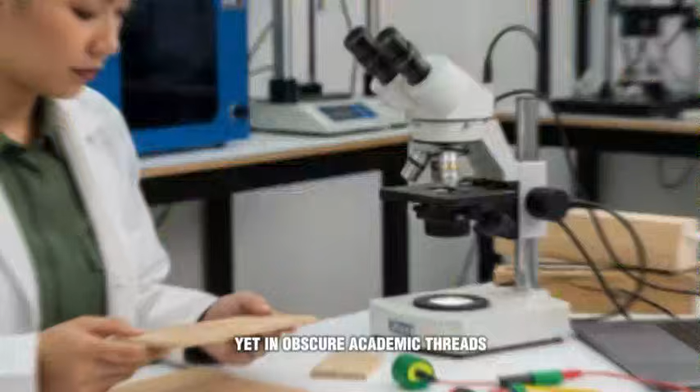Yet in obscure academic threads, a Filipino structural engineer named Rosa Navarro had published tests hinting at extraordinary performance for certain bamboo composites when combined with modern binders. Her papers sat unread in quiet journals. The viral promotion flung those findings into an impatient global spotlight.

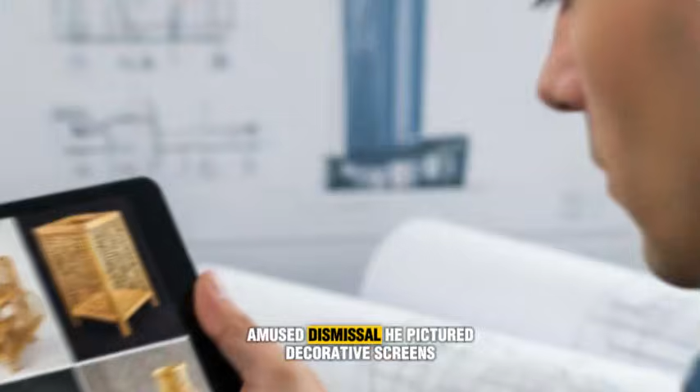Omar's initial reaction was emblematic: amused dismissal. He pictured decorative screens, artisanal workshops, and heritage displays, beautiful but irrelevant to mega towers. His firm's risk matrix assigned such offers low priority. Procurement booked only a handful of seats for junior architects as a cultural perk.

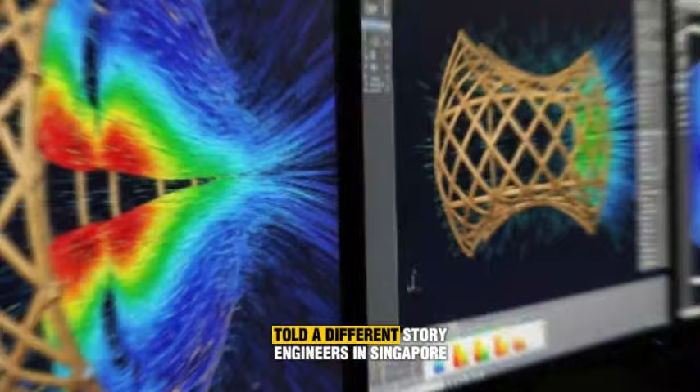News feeds, however, told a different story. Engineers in Singapore, Melbourne, and several Gulf offices saw screenshots of resilient lattice structures withstanding extreme wind tests in simulations Rosa had run. A murmur grew into a debate. Could indigenous materials inform large-scale design? For Omar, the question seemed rhetorical until a dataset arrived that refused to be aesthetic alone.

Meanwhile, in Cebu, Rosa Navarro watched the viral frenzy with wary fascination. Rosa had grown up near coastal villages where traditional builders used a hybrid of bamboo species, woven frameworks, and lime-pounded infill for community structures. She pursued formal engineering, but her research always looped back to the question of resilience. Why did lightweight hybrid houses survive cyclones with less damage than some modern masonry?

Her journals recorded controlled tests comparing tensile strength, energy absorption, and joint ductility. The results were nuanced. Bamboo composites showed superior energy dissipation in lateral loading when hybridized with steel ties and modern epoxy in precise configurations. Rosa feared oversimplification, yet she recognized an opportunity.

The tipping moment came when a private engineering blog in Dubai reposted Rosa's simulation videos without context, captioned, "Bamboo beats steel?" The post ignited skepticism and curiosity in equal measure. Omar received a forwarded message from a junior with the subject line, "Worth the trip." The junior argued that understanding alternative materials might reduce foundation loads and life cycle costs for future projects.

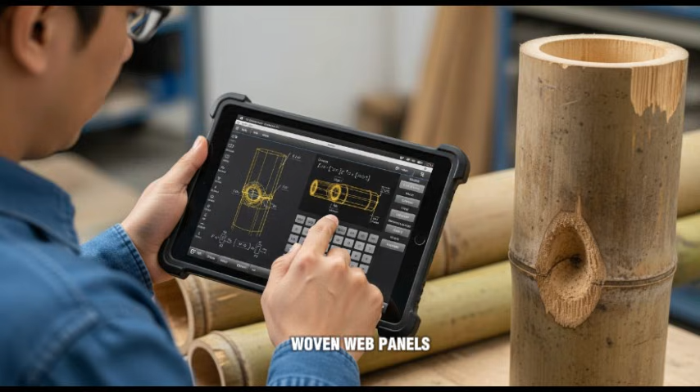Omar's first day on site began with confident surveys and condescending smiles. The exhibition hall displayed prototypes: bamboo-reinforced columns, woven web panels, and modular nodes crafted with precision.

He tapped calculations into his tablet while evaluating joints with the clinical eye of someone who made warranties. At a demonstration, a senior local builder, an unassuming man named Mang Ben, stood barefoot and invited a volunteer to apply lateral force to a mid-sized lattice panel. The panel flexed and returned, absorbing energy with a controlled rhythm.

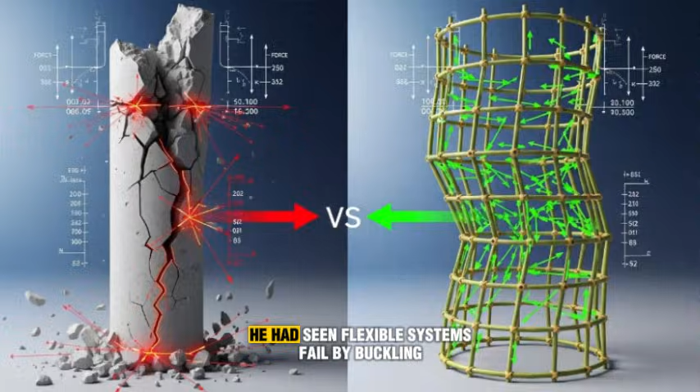Omar frowned. He had seen flexible systems fail by buckling. This showed ductility without catastrophic collapse. He stayed to watch more tests, unconsciously extending his schedule. Rosa arranged a controlled demonstration the following morning.

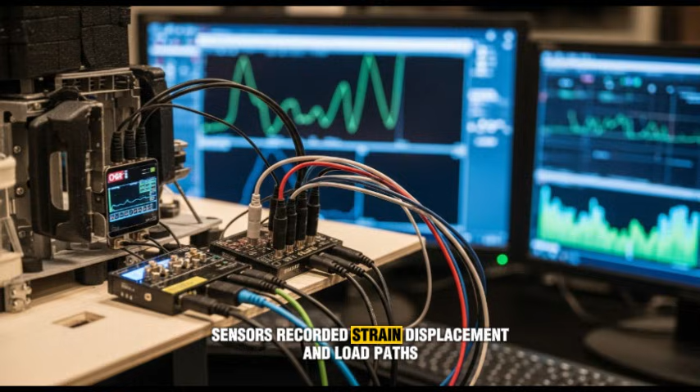Scaled tower models were subjected to simulated gusts, using programmable fans and varying mass distributions. Sensors recorded strain, displacement, and load paths. The models combined modern steel cores with bamboo lattices and polymer joints, hybridization designed to marry stiffness and flexibility.

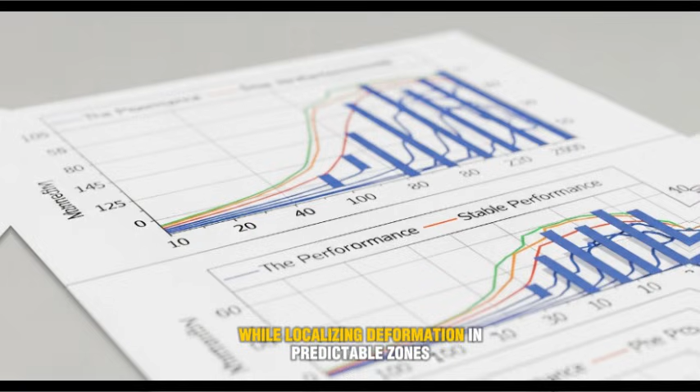Omar scrutinized output graphs printed across boards. The data did not flirt with ambiguity. It suggested that certain hybrid configurations reduced peak inertial loads by a measurable margin while localizing deformation in predictable zones. An uneasy thought surfaced. These configurations could reduce foundation depth requirements in some contexts, lowering costs and carbon footprint. Professional curiosity stabbed through skepticism.

The festival buzzed as engineers shifted tone from spectacle to inquiry. Delegations formed around Rosa's lab, swapping sketches and asking about joint tolerances, species selection, and maintenance regimes. Omar found himself staying longer than planned, interrogating material creep data and fatigue cycles. He consulted published code amendments from experimental construction trials in Southeast Asia.

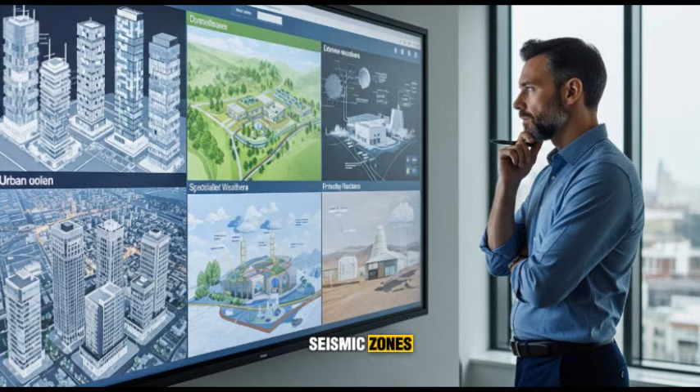He realized that the technology's value wasn't universal. It was contextual, best suited for mid-rise typologies, seismic zones, and regions where reducing embodied carbon mattered. The revelation unsettled his assumptions, but excited his engineering instincts. How to translate localized genius into reliable, standardized practice for metropolitan applications?

Tensions rose when a senior executive from Omar's firm declared publicly that the entire experiment was nostalgic nonsense, unfit for liability-laden projects. The executive argued for maintaining the company's conservative stance and avoiding reputation risk. The statement went viral among attending engineers and provoked heated exchanges in technical forums. Some saw the executive's stance as protective, others condemned it as closed-minded.

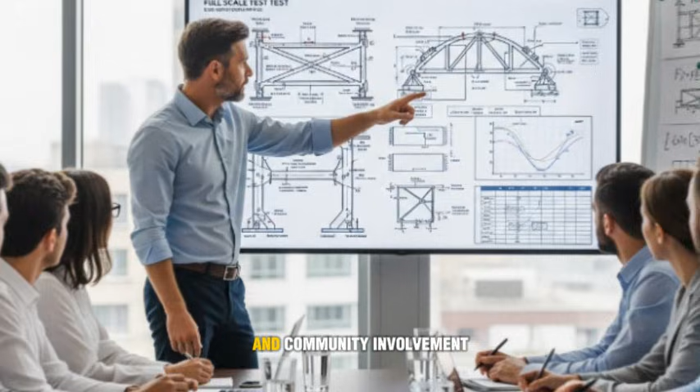Omar found himself torn between corporate caution and empirical curiosity. He requested a controlled field experiment using full-scale mock-ups and professional instrumentation. Rosa and local masters agreed, conditional on meticulous documentation and community involvement. The next phase involved building full-scale test frames on a coastal testbed outside Cebu City.

Local carpenters and university students worked with visiting engineers to assemble hybrid nodes, combining treated bamboo, high-strength steel ties, and advanced epoxy bonding. Mang Ben taught craft techniques, precise lashing patterns, and species selection, while Rosa insisted on modern instrumentation placement, accelerometers, strain gauges, and thermal sensors.

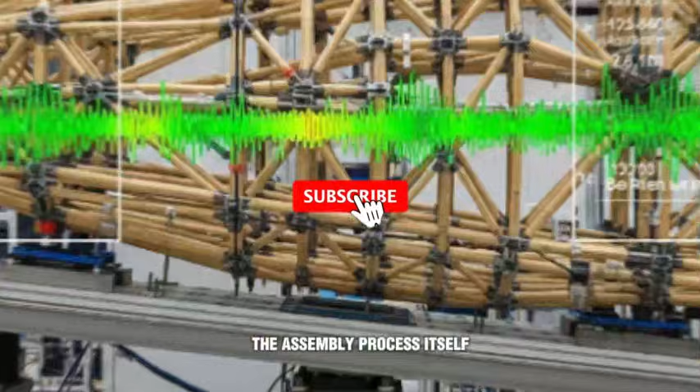The assembly process itself became a study in knowledge transfer, Western engineers learning hand techniques, Cebu builders learning instrumented documentation. The process produced friction and laughter, arguments over tolerances, and quiet moments of mutual respect.

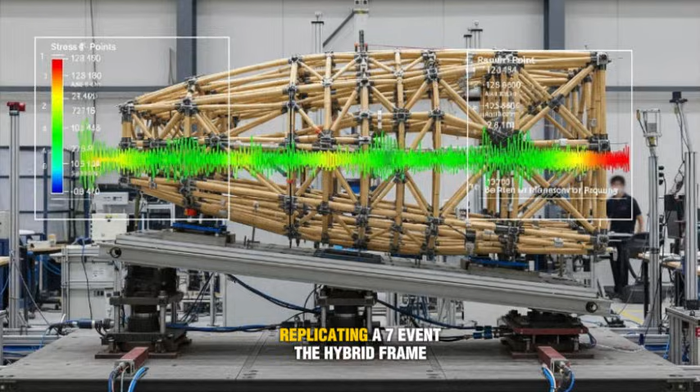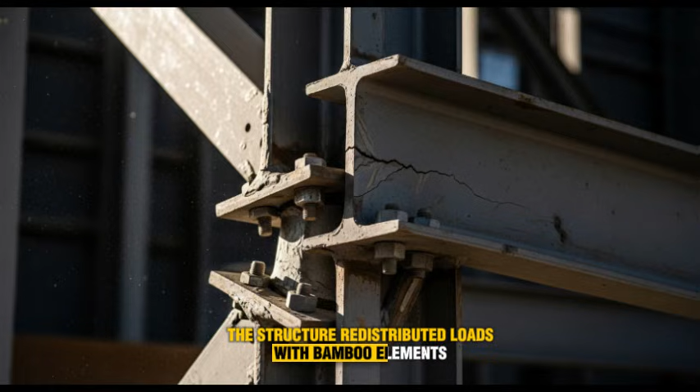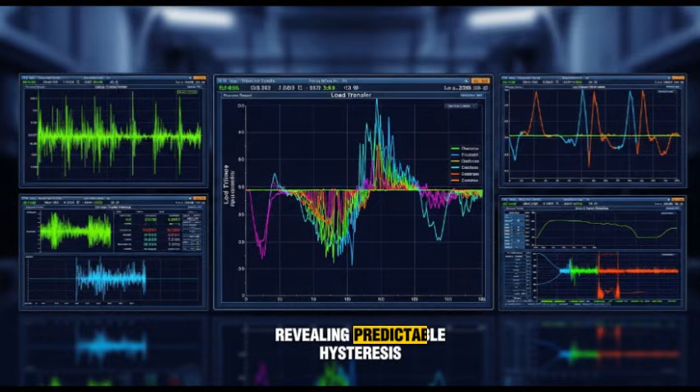When the first controlled seismic simulation ran a lateral shaking protocol replicating a magnitude 7 event, the hybrid frame exhibited a fascinating failure sequence. Instead of brittle breaks, the structure redistributed loads, with bamboo elements yielding progressively while steel cores maintained integrity. Loose connections acted as sacrificial fuses, preventing total collapse. Data streams visualized load transfer during cycles, revealing predictable hysteresis beneficial for energy dissipation.

Omar watched the live telemetry with the focused intensity of someone watching a derivation prove itself. He felt a professional jolt. If replicated reliably, these hybrid principles could reduce retrofit costs, increase resiliency for certain typologies, and shift sustainability metrics substantially. Yet, scientific rigor demanded scrutiny.

Skeptics pointed to long-term degradation concerns, biodegradation, moisture ingress, and fire resistance. Rosa and local researchers acknowledged these risks and presented mitigation pathways, species-specific treatment protocols, encapsulation techniques, and hybrid protective layers using treated timber composites. They produced life cycle analyses factoring local maintenance realities.

The findings showed that treated bamboo, if properly specified and integrated, offered competitive durability while drastically lowering embodied carbon compared to pure steel-concrete systems. The debate evolved from aesthetic novelty to engineering problem-solving: how to standardize treatments, warranties, and maintenance protocols across climates.

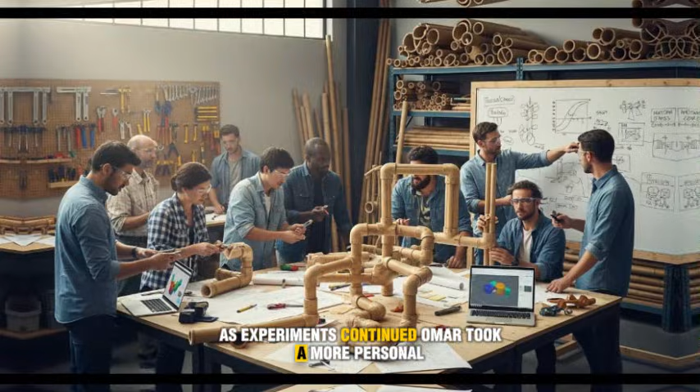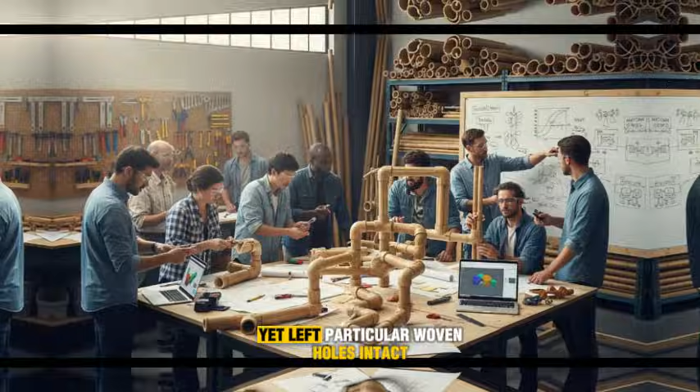As experiments continued, Omar took a more personal turn. He visited a coastal barangay where hybrid techniques had been used in vernacular communal buildings for generations. He listened to elders describe storms that carved paths through islands, yet left particular woven halls intact. He met families who maintained these structures with routine care, replacing nodes and relashing connections as communal practice.

The social architecture, shared responsibility, and local skill networks emerged as critical to structural longevity. Omar realized engineering was not only about materials and forces, it was also about social systems that sustain maintenance. This reframing nudged him toward humility. Engineering must account for culture as infrastructure.

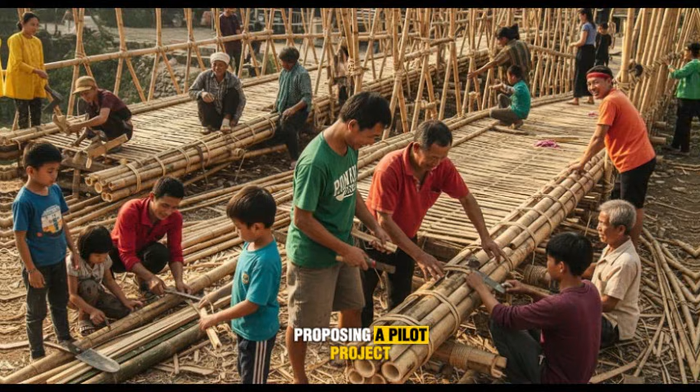Architects circled potential applications. Omar returned to his firm with datasets and field notes, proposing a pilot project integrating hybrid systems into a mid-rise mixed-use block in a coastal emirate vulnerable to shifting loads and sustainability mandates. The proposal navigated corporate resistance, regulatory hurdles, and professional conservatism. Yet it also found advocates who saw the pilot as a strategic differentiator in an increasingly carbon-conscious market. The pilot moved forward cautiously.

Design teams collaborated across time zones, exchanging CAD models, joint specifications, and environmental performance projections. Rosa led a technical exchange team, translating local craft tolerances into engineered connection details and maintenance manuals. Mang Ben and his crew trained certified craftsmen who could replicate nodes to exacting tolerances. Fabrication processes combined CNC cut molds for polymer connectors with hand-woven bamboo panels, achieving reproducible assembly while preserving essential artisanal flexibility.

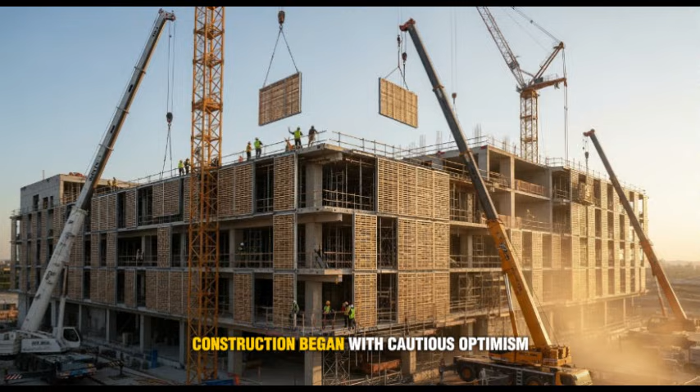The project team emphasized documentation. Every node tagged, every material batch logged, and every treatment step recorded for future audits. This transparency sought to bridge trust gaps between innovation and liability. Construction began with cautious optimism. Local crews and visiting engineers calibrated assembly methods, tested mock connections, and iterated designs.

When high winds arrived unexpectedly one afternoon, the team witnessed the hybrid facade absorb gusts differently than typical curtain walls. Movements were visible but controlled, and connections flexed without fracture. Cameras captured the motion. Sensors printed reassuring telemetry. Omar felt a private shift, an erosion of absolute certainty into conditional confidence. He began discussing maintenance plans not as afterthoughts, but as integral specifications, recognizing that community training and scheduled inspections were as essential as bolts and adhesives.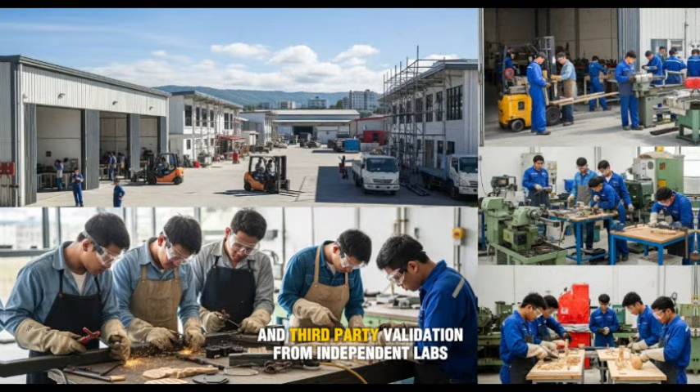Critics still probed. A prominent engineering regulator demanded 5-year performance guarantees before approving broader adoption. Rosa responded with humility and evidence: multi-year pilot monitoring, accelerated aging tests, and third-party validation from independent labs. The team published interim reports and invited skeptics to inspect protocols.

Transparency worked as persuasion. When independent labs corroborated the hybrid system's durability under specified treatments and maintenance cycles, regulatory attitudes softened. The narrative shifted toward conditional endorsement. Hybrid bamboo systems could be integrated responsibly when paired with documented maintenance regimes, rigorous material treatment, and accredited craft networks.

The project's socio-technical ripple effects surprised many. Cebu's craft guilds gained formal recognition, apprenticeships expanded, and local economies diversified around certified node manufacturing. Dubai's architects discovered that aesthetic palettes could expand while life cycle impacts shrank. Environmental engineers celebrated reduced embodied carbon figures, while urban planners pondered adaptive low-cost housing strategies in coastal zones.

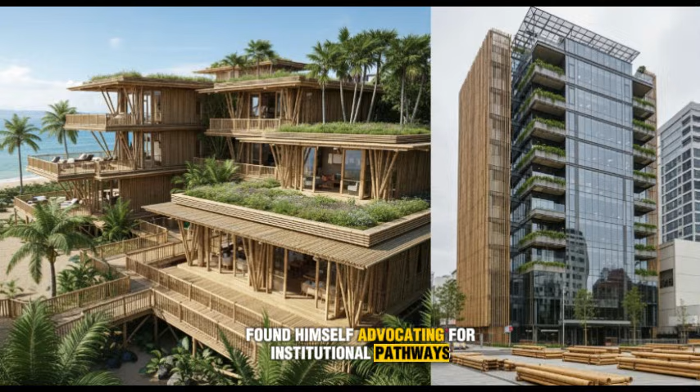The exchange reframed technology transfer. Instead of extraction, the collaboration emphasized co-development and mutual capacity building. Omar, once a skeptic, found himself advocating for institutional pathways to integrate contextual materials into mainstream practice, provided governance frameworks honored both safety and culture.

The authority reversal culminated when Omar publicly addressed his colleagues in Dubai at an industry symposium. He described his initial dismissal and the evidence that changed his view. He credited Rosa, Mang Ben, and Cebu's craftspeople for their rigor and patience. He acknowledged the arrogance embedded in assuming superiority of steel-built materials without considering local adaptability and life cycle realities. The confession was not theatrical, it was professional and measured.

Omar proposed formal partnerships for standards development and called for cross-cultural accreditation frameworks. His apology, combined with practical proposals, shifted debate from finger-pointing to policy-making. Professional humility began influencing institutional choices. International insurers and code bodies responded pragmatically. They convened joint working groups to draft guidelines for hybrid systems, emphasizing inspection cycles, treatment verification, and maintenance warranties.

Certification schemes emerged for accredited node fabricators and craft apprentices. Funding bodies allocated grants to support longitudinal studies, comparing life cycle costs and performance metrics across climate zones. Rosa's laboratory received additional research funding to expand tests to fire retardancy and termite resistance under treated protocols. The result was a layered governance approach, innovation accompanied by oversight, not laissez-faire adoption. The balance reassured stakeholders and preserved cultural practice. The Cebu-Dubai collaboration produced prototypes beyond pilot blocks.

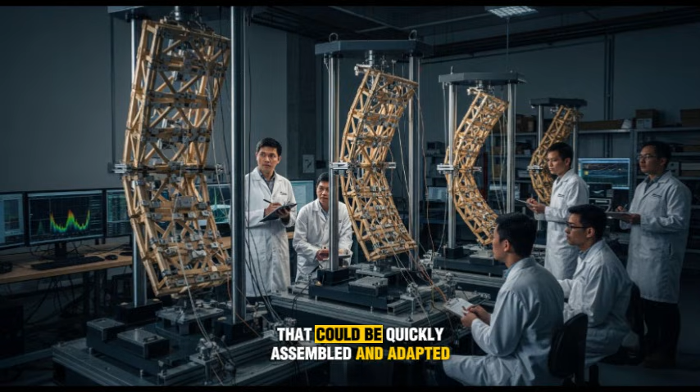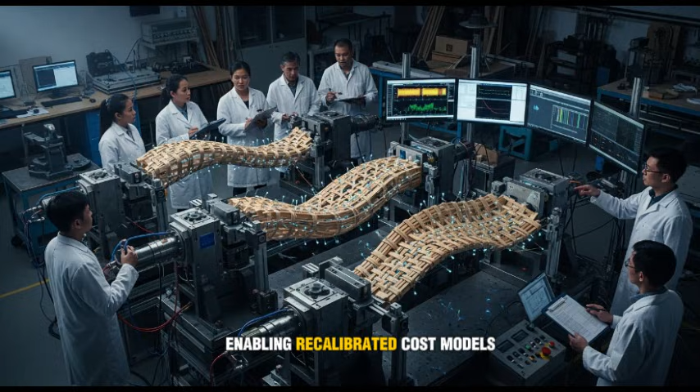Coastal community centers rebuilt with hybrid frames that offered storm resilience and local pride. Modular schoolrooms that could be quickly assembled and adapted, medium-rise facades in Dubai that showcased lattice aesthetics while meeting performance standards. Engineers documented energy savings and reduced foundation loads in specific designs, enabling recalibrated cost models for certain building types.

The collaboration emphasized context sensitivity. Hybrid systems were not universal replacements, but strategic tools for sustainability. Their integration required careful systems thinking, stakeholder training, and long-term monitoring commitments. The human stories behind technical reports mattered.

A young Cebu apprentice named Liza became a certified node technician, earning steady income and mentoring younger students. A Dubai project manager who once scoffed now requested continued knowledge exchanges, traveling regularly to Cebu. Mang Ben's guild gained municipal support to formalize apprenticeships, reducing out-migration by providing local opportunities.

These micro-level shifts underscored deeper truths. Technological adoption must consider livelihoods and cultural identity. The collaboration matured into mutual reinforcement rather than extraction, blending craft dignity with engineering standardization. Critics of globalization found the case instructive. They argued that even beneficial exchanges risk commodifying culture if not governed ethically.

The Cebu-Dubai partnership responded by embedding benefit-sharing clauses into contracts, royalties for traditional knowledge holders, scholarship funds for apprentices, and co-ownership of patents for hybrid connectors. Legal counsel crafted contracts acknowledging cultural custodians as co-authors of technical innovations.

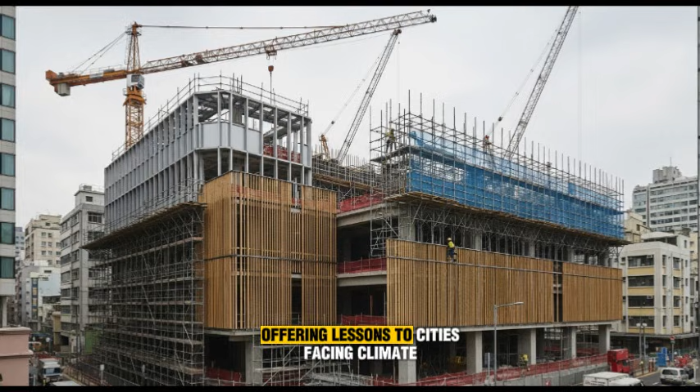Omar's apology transformed into policy, and policy into practice, yielding resilient prototypes and renewed professional norms. Years later, the pilot projects remained monitored case studies, offering lessons to cities facing climate uncertainty and resource constraints. Dubai incorporated hybrid facades in select projects, adhering to strict protocols and maintenance regimes.

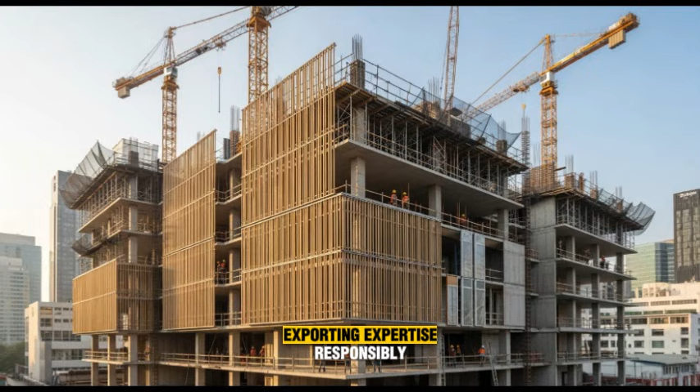Progress grows where curiosity meets rigor and where respect for local wisdom becomes actionable policy. The Filipino technique did not break Dubai's engineering, it complemented it under defined conditions. The engineers who traveled to Cebu returned with new tools and a changed posture. Less certainty, more listening. Communities in Cebu gained economic opportunities and formal recognition for craft knowledge.

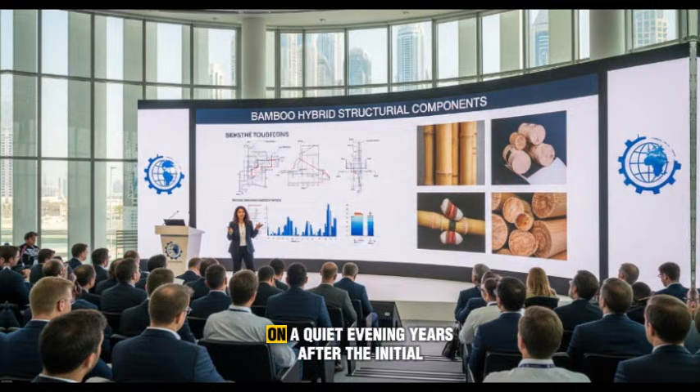The exchange rebalanced narratives of expertise. Mastery sometimes resides in unexpected places, and professional pride must yield to empiricism and partnership when evidence calls. On a quiet evening, years after the initial viral fuss, Omar returned to Cebu not as a skeptic, but as a colleague. He stood under a lattice facade that filtered sunlight into measured patterns, watching children play in its shade.

Rosa walked beside him, pointing out craftsmanship subtleties and maintenance rhythms. Mang Ben greeted them, smiling modestly. No award ceremony framed the moment. There was only mutual acknowledgement and a shared commitment to preserve knowledge responsibly.

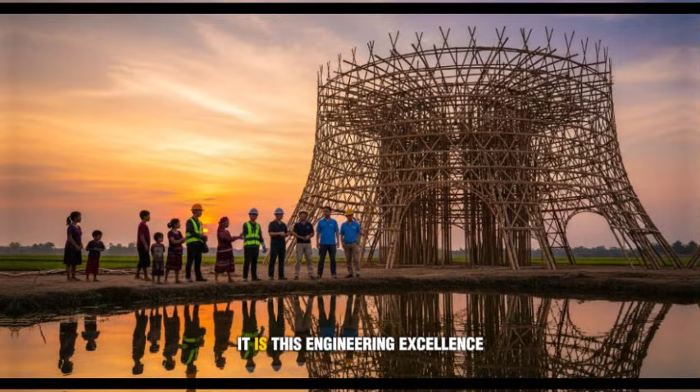If there is a single takeaway from this documentary arc, it is this. Engineering excellence pairs technical rigor with cultural humility. When institutions listen, ancient techniques can become modern instruments for resilience, and humility becomes the foundation on which the tallest towers can stand.